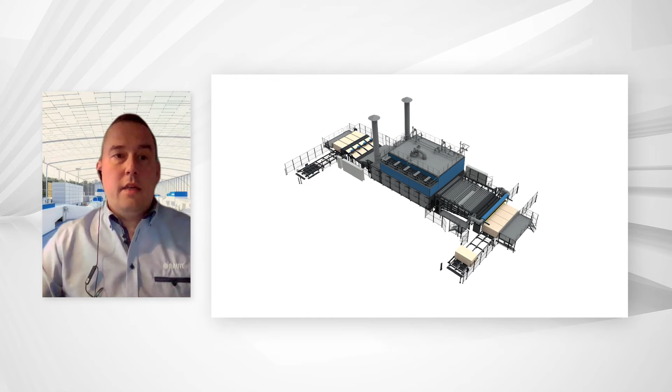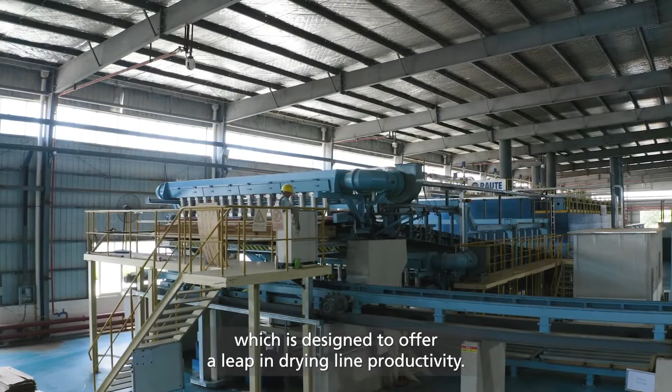Today I'm introducing you Raute R3 drying line, which is designed to offer a leap in drying line productivity. With this line, we have now been able to bring decades worth of our drying process experience and know-how into an efficient and affordable package.

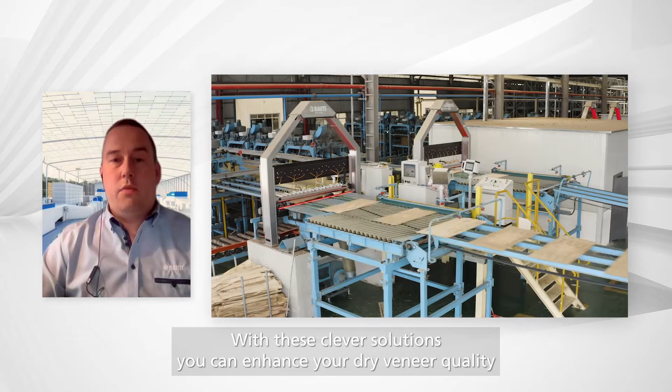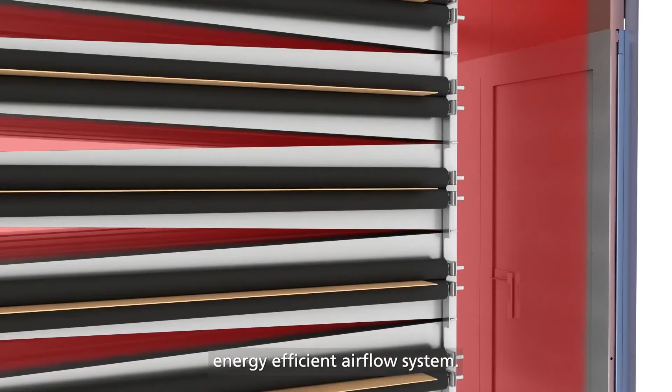With these clever solutions, you can enhance your dry veneer quality and at the same time enjoy the benefits of minimized energy consumption. Raute R3 dryer features the industry-proven energy-efficient airflow system. Effective heat transfer with specially shaped jet nozzles ensures uniform drying results with all wood species and veneer thicknesses.

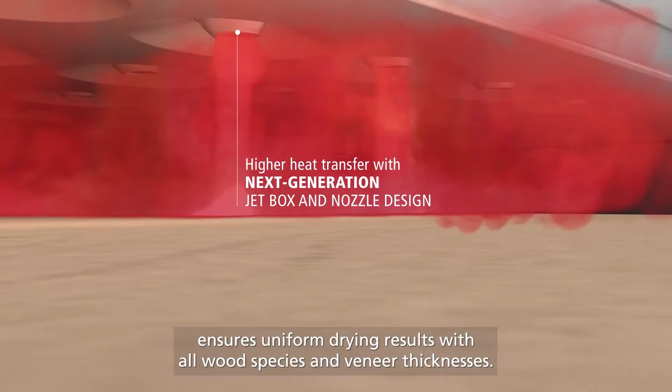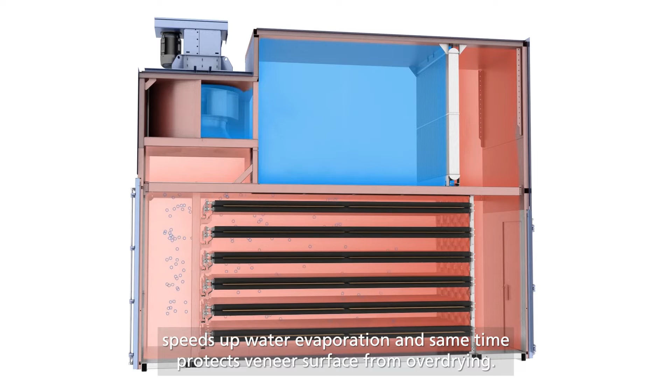Raute's high humidity drying concept maximizes the heat transfer into veneers and speeds up water evaporation and at the same time protects the veneer surface from overdrying. And this is not all. In addition to enhanced veneer drying capacity and quality, high humidity drying means also smaller energy consumption and heating costs.

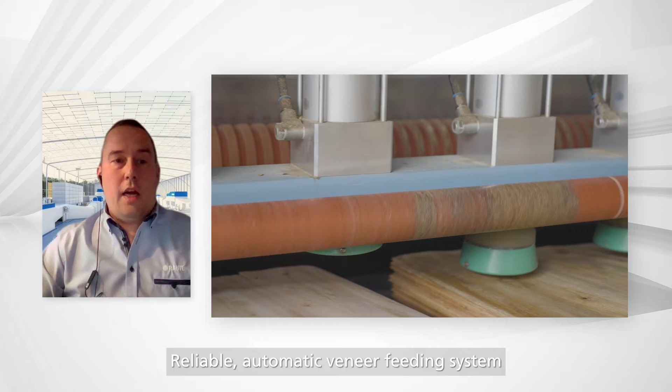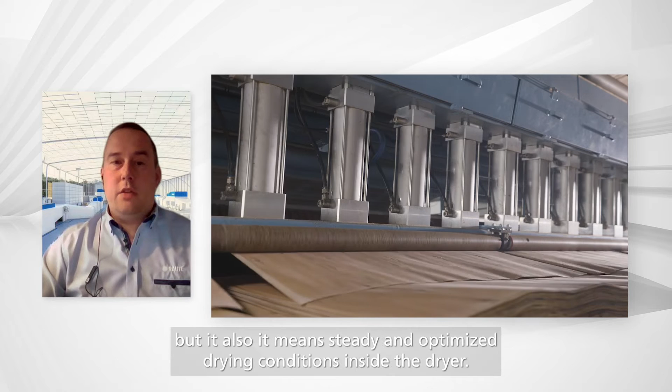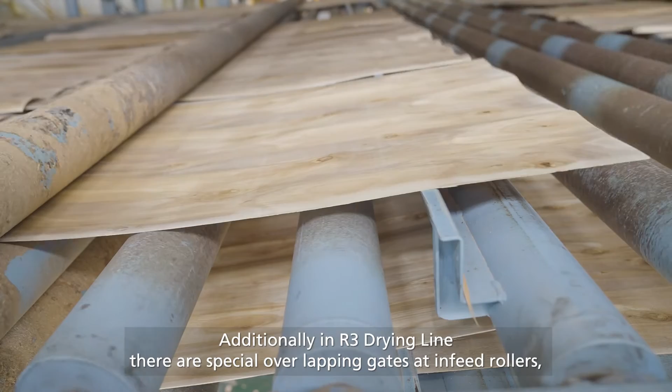Reliable automatic veneer feeding system is the key to ensure proper filling ratio in drying. Constant sheet flow not only means capacity, but it also means steady and optimized drying conditions inside the dryer. Additionally, in the R3 drying line, there are special overlapping gates at infeed rollers, which position veneers into overlap to prevent splitting at veneer ends, further improving the filling ratio of the dryer.

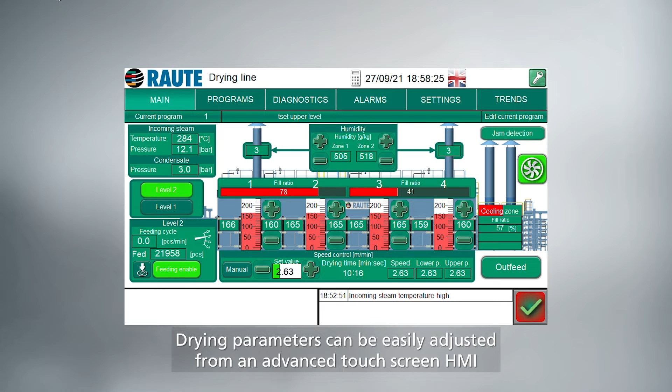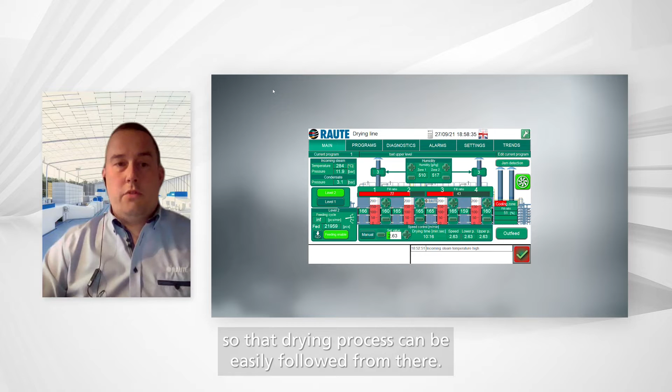Drying parameters can be easily adjusted from an advanced touchscreen HMI, and you can save all your well-performing recipes for later use. All main parameters are visually available on the main screen, so that the drying process can be easily followed from there. Additionally, separate line functions can also be operated manually through the HMI.

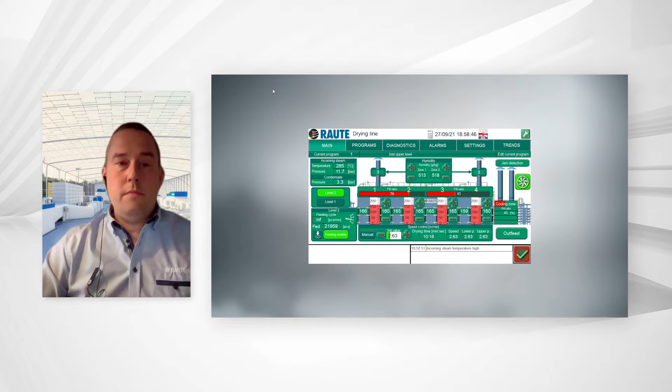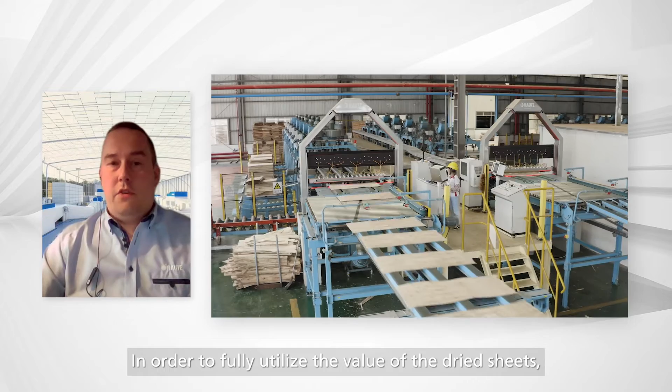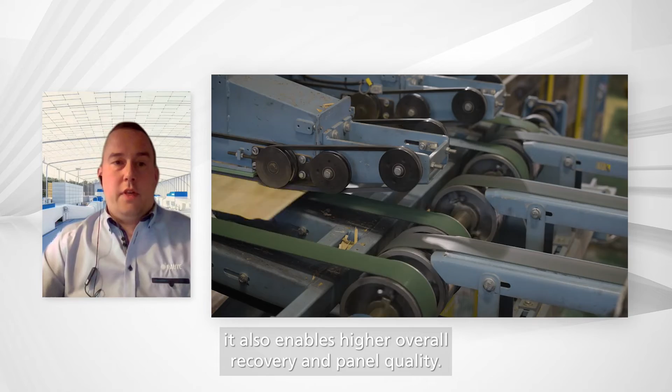Comprehensive inbuilt diagnostics give great benefits for analyzing line operation. From the HMI, you can see the active state of every single motor, sensor or photocell of the line. In order to fully utilize the value of dry sheets, the automatic grading line gives you multiple benefits. Not only does it minimize the need for costly manual labor in dry sheet handling, it also enables higher overall recovery and panel quality.

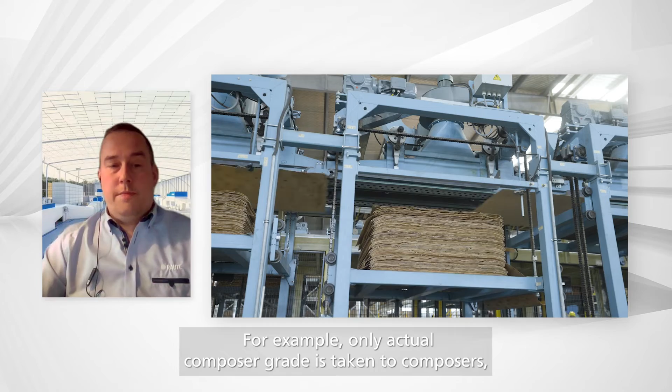Properly graded veneers can go directly to next processes without any additional handling. For example, only actual composer grade is taken to composers, or actual patching grade is taken to patching. All other grades can go directly to layup and gluing. And this really increases the productivity and the recovery.

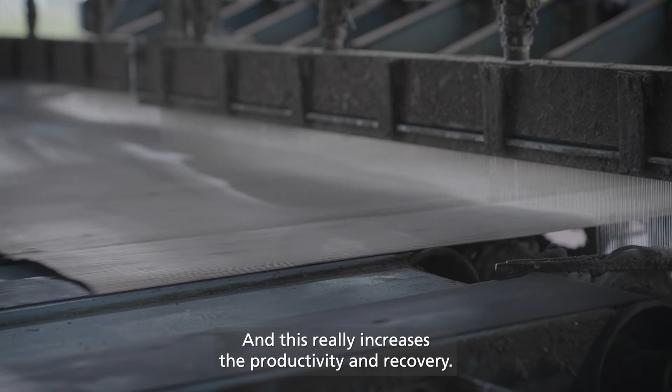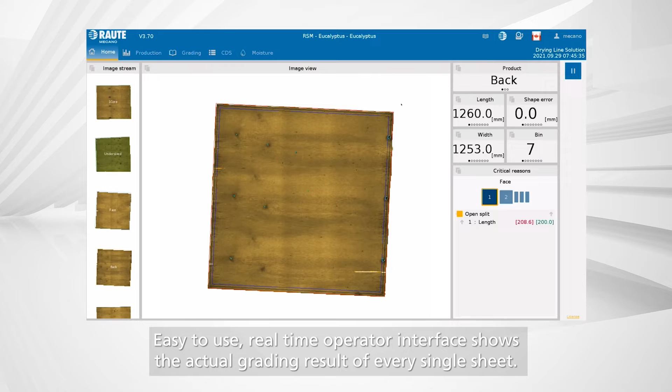Moisture measurement with automatic dryer speed control helps you to maximize the dryer capacity without overdrying the veneers. And at the same time, the amount of wet veneers needing to be redried is minimized. Easy to use real-time operator interface shows the actual grading results of every single sheet.

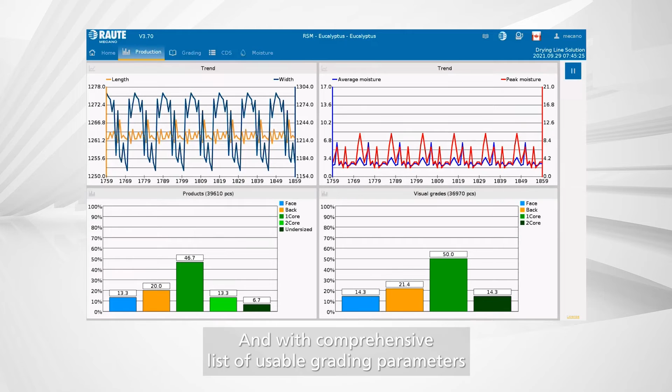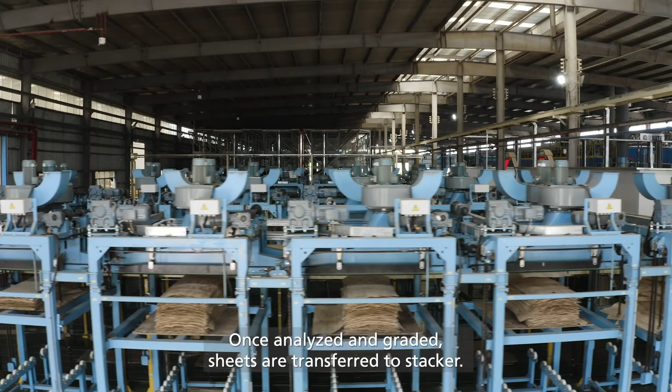From the HMI, you can see the production reports and statistics, and with the comprehensive list of usable grading parameters, you can create the right recipe to ensure the final panel quality. Once analyzed and graded, sheets are transferred to the stacker. All sheets are then automatically stacked into correct stacking bins, ready for following processes.

And since the amount of stacking bins can be freely chosen, Raute R3 drying and grading lines offer the perfect fit for your dry veneer production.